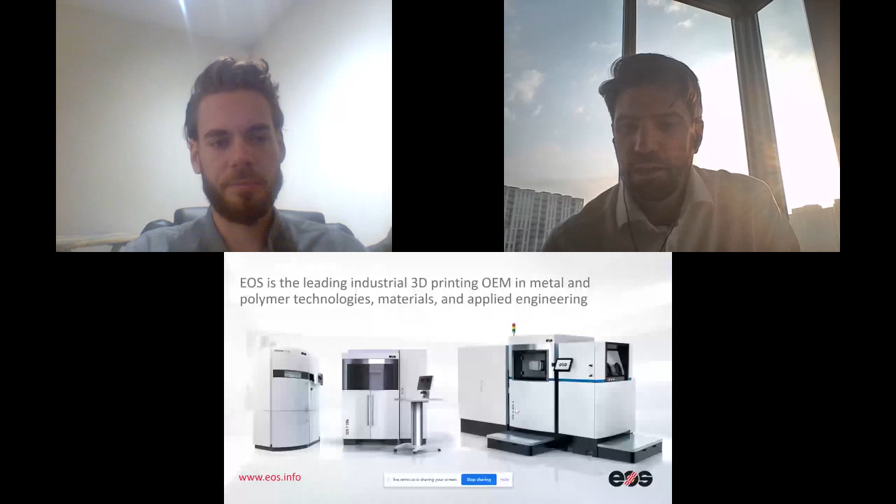For today, we want to talk about four main topics. First, the current supply chain problems we see, with some current events. We want to talk about global distributed manufacturing, what that means to us and what we think it should mean to the world. We have some examples to discuss, companies that are already up and running doing this, and finally conclusions with a bit of call to action and reach out to help. So first, let's start with some current supply chain problems.

Sometimes I have the feeling, and I've been considering this for the past few weeks as the coronavirus has really taken off worldwide, what are some of the unintended consequences of these catastrophic events? Does it lead to tipping points of different technologies which may or may not have been around for a while? I thought of the following three examples.

And the first is telemedicine. For those who don't know what telemedicine is, you've probably heard it in the past weeks, but telemedicine is not new. It's been around for the last 10 years. People have been trying to start different companies surrounding the topic.

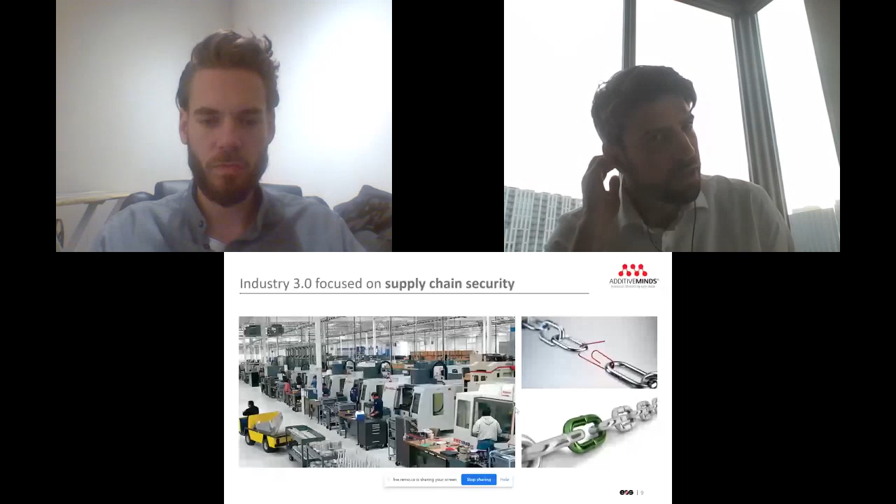That trend is something I think needs to be considered. If we look forward to what's possible with not a strong and rigid supply chain, but a flexible and agile one, then we have to consider a switch from what we call Industry 3.0 to the buzzword of recent years, Industry 4.0. And what does that really mean?

You constantly monitor planning, order, and status, either from your distribution center or production center, all the way to the consumer. And in this way, if one piece of your supply chain ecosystem goes down, it can be easily replaced and picked up by another.

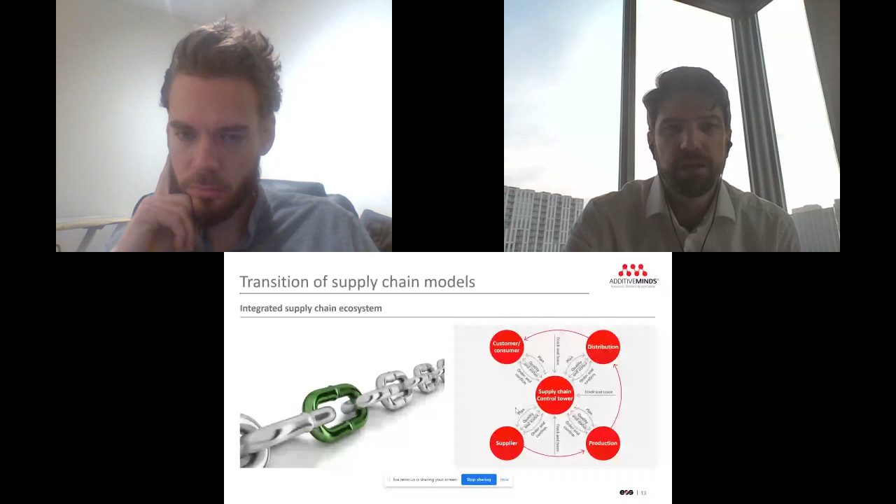So Fabian, I'll turn it over to you now to talk about global distributed manufacturing.

Awesome, thanks. Maybe to continue the story Greg just told, I think we all understand that Amazon especially has really revolutionized and even democratized supply chains. But what they're not able to do as of today is revolutionize the early stage of those supply chains, which in the end are highly dependent on manufacturing. Greg, if you could go on to the next slide.

We rarely talk about simply creating a safety net with additive manufacturing in traditional supply chains in times of disruption. Today we can all realize that even though we're so used to Amazon Prime and same-day delivery, that's not the case anymore. Amazon does not deliver on the same day. Why? Because they have manufacturing issues they're not able to resolve just by recreating the end of the supply chain.

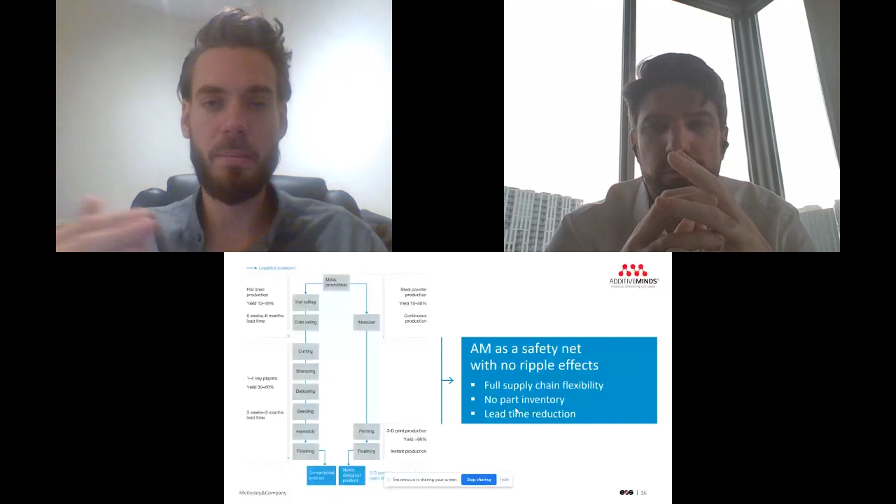In the US alone we have inventory cost and capital stuck in inventory that's the size of the GDP of Australia, which means a lot of resources could be freed up by implementing a parallel supply chain of additive manufacturing to mirror certain changes in demand. If you could go to the next slide.

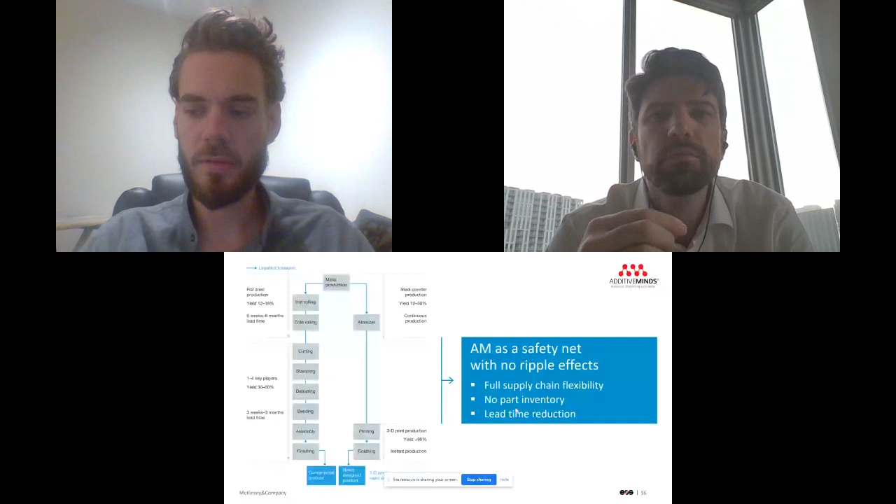I see we have five minutes left, so I'm going to speed up a little bit. Greg, if you could click one more time for us to see the whole animation.

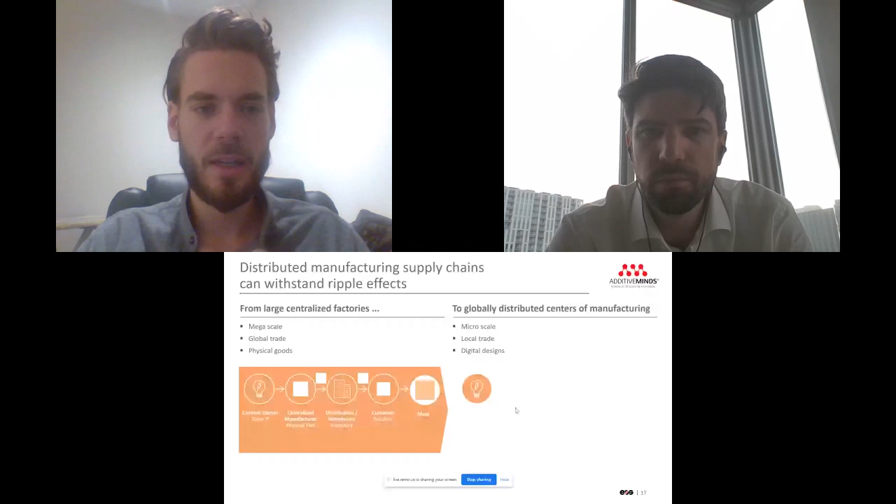So that means that we now experience, as Greg also mentioned, that we're highly dependent on centralized factories. If we look at masks now, they are mainly manufactured in the APAC region, where months ago the disruption of the manufacturing supply chain significantly slowed down the manufacturing of those masks, and we also had an increase in demand, and our inflexible supply chains were not able to complete that shift.

So when we add additive manufacturing to the mix with complete asset flexibility, we understand that certain demands are going down and demands for an example like masks are going up, we can completely switch this over. Even with transportation struggles from the APAC region to North America, if we have localized manufacturing cells here in the US or Europe or wherever you are, producing on-demand products for local demand, we are way more flexible and less vulnerable to disruptions in our supply chains due to pandemics as we experience today, due to trade wars as we experienced before and are still experiencing. The media just isn't covering it as much, or even natural disasters that, as Greg talked about, climate change are still increasing and will have a big impact on our global supply chains.

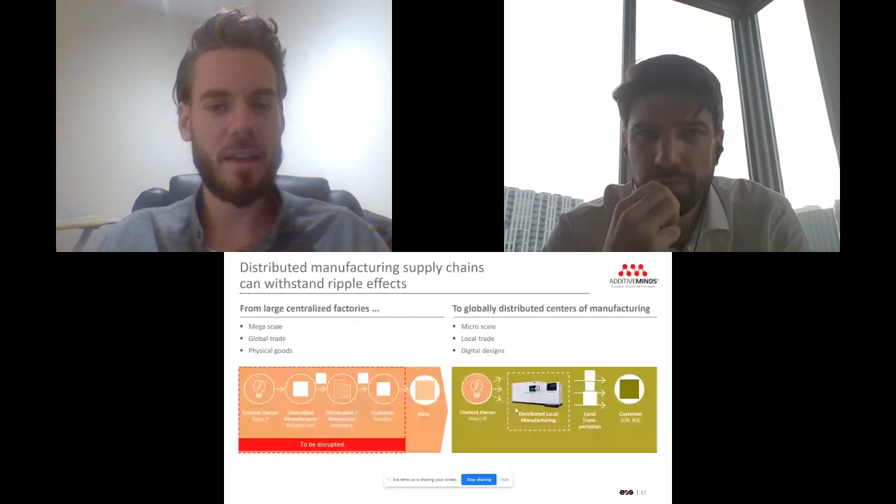So if you go to the next slide, and yes, that will be disrupted. We can also see that that's nothing that just we're making up to promote the technology.

If we look at another global consulting organization, EY, they did a study with their top 900 customers and asked them about their current use and future use of additive manufacturing.

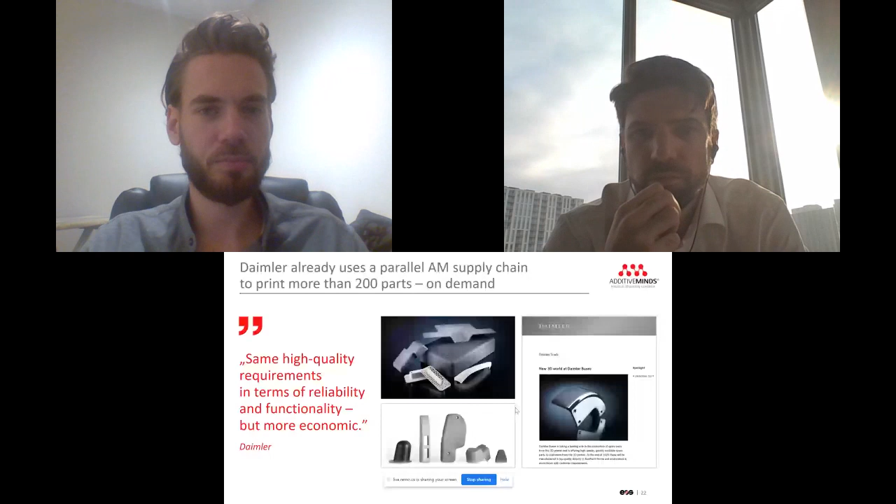Another case study that Greg just talked about, and I'm just going to go over it quickly because I think even all of the participants who have been on LinkedIn have seen those examples of producing masks. As Greg said before, if we substitute those masks in those manufacturing processes, we can deliver very quickly and we can fulfill a demand in a supply chain that cannot be met currently by those traditional manufacturing methods.

Since the switch takes really long and the lead times are quite long for producing new tools, for example, we can completely recreate those masks, and we can produce those with our technology.

Now, if you're talking to engineers within EOS and within our customers, engineers always love to improve things, and we're always problem solvers. So now we're even taking it a step further where we say, okay, we can reproduce those supply chains and we can run a parallel manufacturing chain.

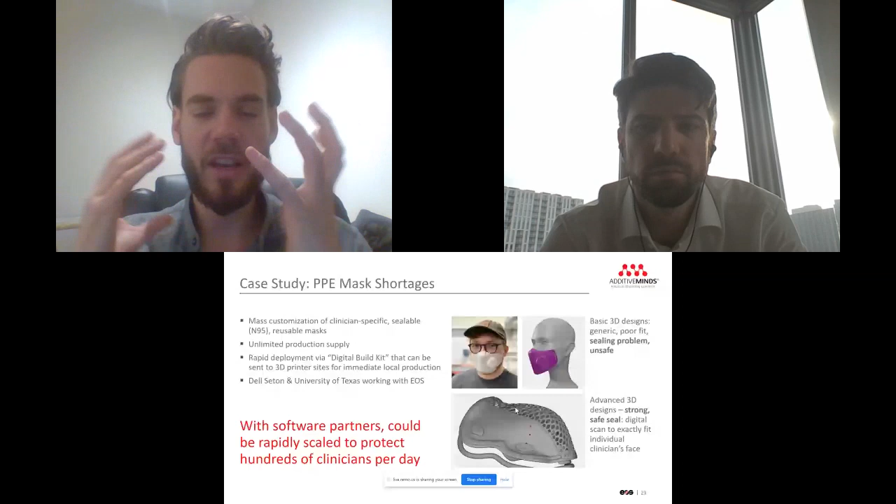But since complexity is free with additive manufacturing, why don't we try to even optimize those masks to give our health workers that are desperately in need of secure personal protective equipment? Why don't we even optimize those products to their face geometries to give them better protective equipment to keep them on the job and keep our healthcare system in place? So that's what we're working on right now, partnering with certain software organizations to give our healthcare workers access to even better protective equipment than they had access to before, by utilizing those new supply chains with additive manufacturing.

And last but not least, internally within EOS, we are also building up a global additive manufacturing production network. We're not only working in localized cells, where the North American market is producing in Austin and Novi, for example, near Michigan, but we're now creating, with the help of Link3D, a global connected additive manufacturing cell network.

And that allows us, number one, to be very flexible with local demands. If we, for example, now have a shift in demand more into the Asia Pacific region, we can balance that shift out with the North American production capabilities that are virtually connected in one global factory.

And if Greg wants to go to the next slide, you can see a few screenshots of our production management system that we use with Link3D.

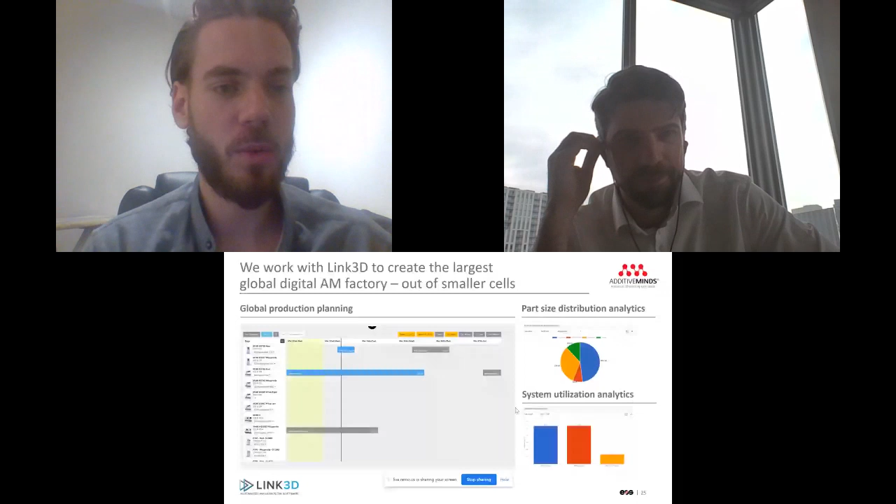Yeah, and as you can see here, we have a global production planning tool in place with Link3D, which means our colleagues from Asia Pacific can also have access to our systems here in Austin, and vice versa.

And it also gives us the opportunity to really run significant and detailed data science projects and data analytics over, for example, our system utilization. How can we increase our system utilization to become even more productive with the same amount of assets, and even run more production and market required analysis, such as which part sizes are in demand right now. Are we experiencing a shift towards larger parts? Are we experiencing a shift towards smaller parts, which even gives us some indications about future R&D projects.

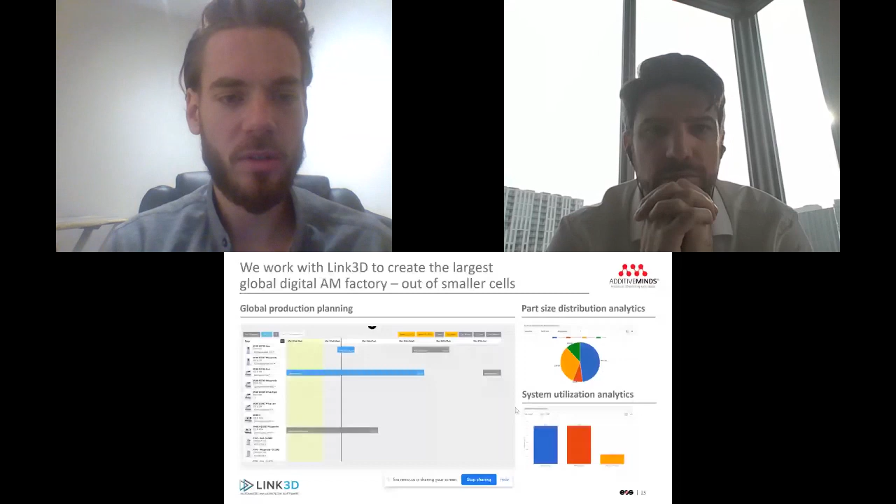Even though we made the decision to run a bit over time, I want to end in a few minutes. Just a quick side note, this is not the end, we're just in the beginning of an industrial revolution, and everybody listening today probably has a little bit of experience in the manual processes of additive manufacturing, which still slow down the agility of those manufacturing processes.

So we're now working, number one, with partners to completely automate those manufacturing cells. In this case, we work with Daimler and with Premium Aerotech to create a fully automated and digitally connected manufacturing cell. We also have the exact same cell in our headquarters in Krailling, where we're running internal production of certain machine parts, fully automated as of today.

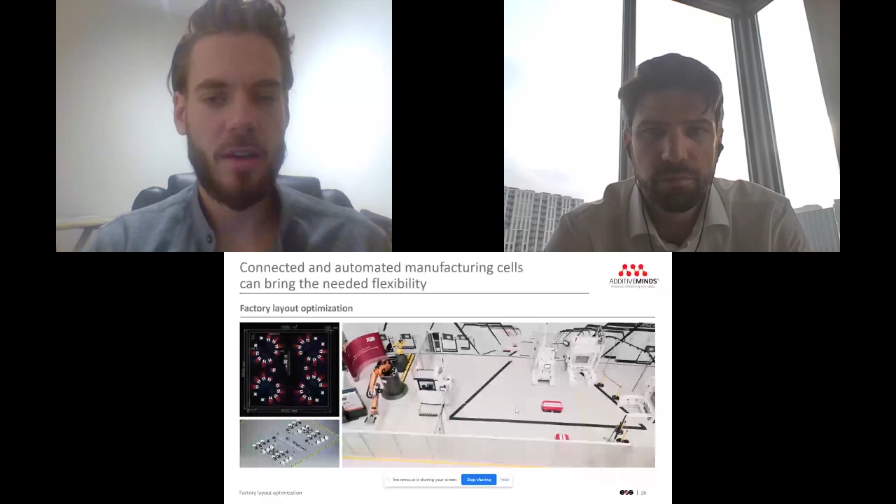So that means, Greg, let's go to the conclusion slide and have a little discussion. If we look at all that we presented today, we certainly have challenges in our supply chains. Those supply chains have been completely optimized, especially for the 20th century. But once we entered the 21st century, we all realize we live in a world where new developments and new technologies come up on a monthly basis. We have shifting customer demands, and we need to optimize our manufacturing towards those new demands.

So what we can see here is a slide that Greg drew, and I think I'm going to let you explain it. Yeah, go ahead. Thanks, Fabian.

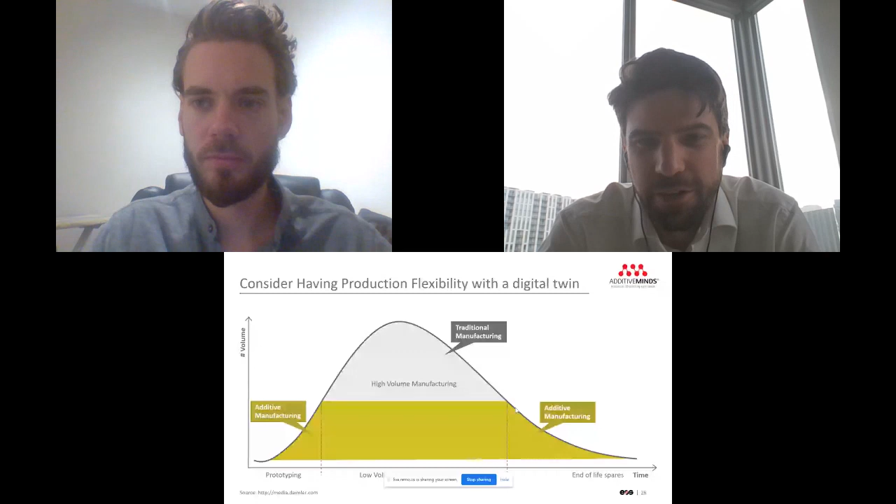So here's where we want to end the presentation. When many companies step into additive manufacturing, quite often they step into the left side of this diagram, and this shows the volume life cycle of a typical product over its life. In prototyping, in new designs, everyone gets the fact that additive manufacturing can be utilized there. What they don't often think about is the right-hand side, which is the example we showed with Daimler, whereby additive manufacturing can be utilized in a financially and time-beneficial way to address end-of-life spare parts.

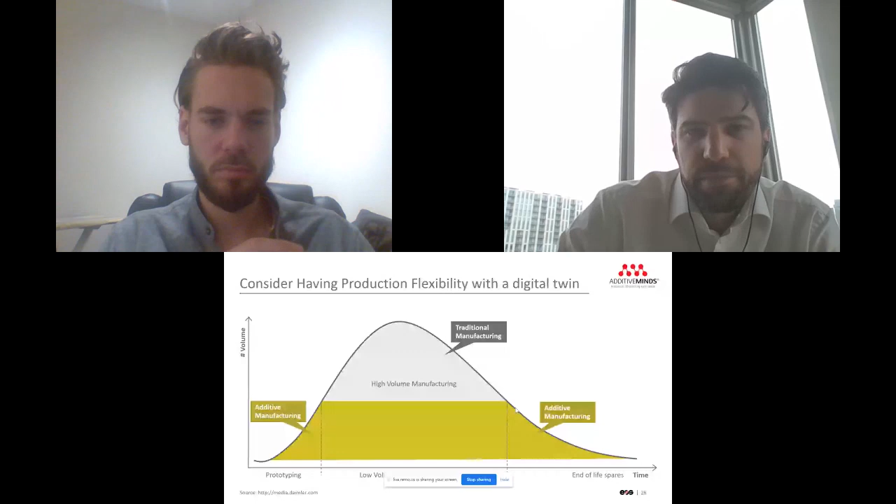If you combine the design and development on the left-hand side with the end-of-life spares and supply chain flexibility on the right-hand side, you can quickly see that additive manufacturing is a viable and flexible production tool that should be added to your traditional manufacturing toolbox. Of course, there will be those high volume, simple parts where injection molding in terms of cost per part will still take priority. However, for flexibility and for dealing with dire circumstances, having the capability in your designs and for your spare parts to utilize additive is extremely beneficial, and we see these use cases happening throughout the world.